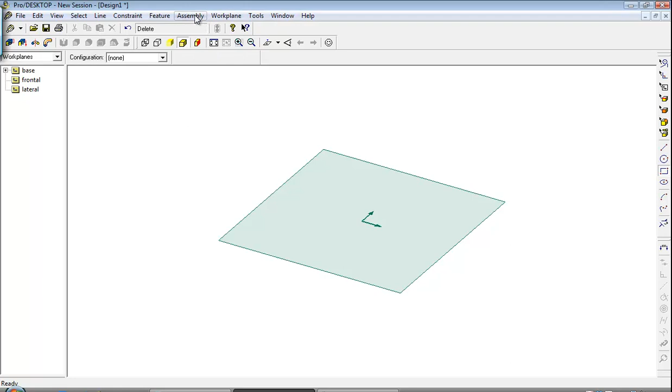The only command I'm going to use is the assembly menu. By clicking onto assembly, I'll click on add component, find the folder I want to drag in, which is going to be the base box, that one. I'm just going to move that out to the centre, because every time I insert a product it'll insert it over top of each other, so this just helps me assemble them.

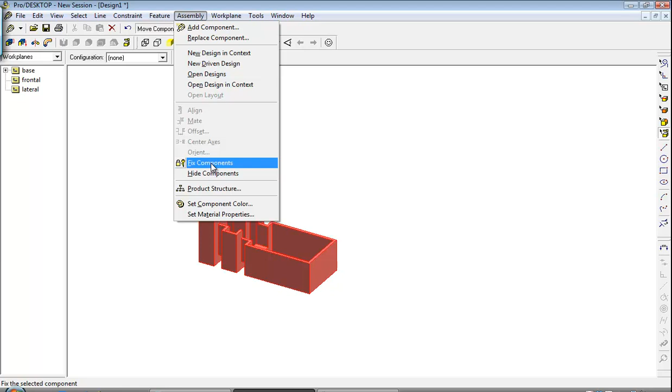Now I am going to fix this and make it an anchor, so I'll go to assembly again, fix components, and that's the only component you need to fix. Everything else will be built around this, or linked or referenced to that part, so it shouldn't move.

So, assembly, add component. Move in the second part, which is going to be internal. I haven't checked that any of these fit at the moment, so I'm hoping they do, but I'll find out in a second. All I'm going to do now is click onto the internal face of the box if I can. I think there it is, and I'll go to assembly and align.

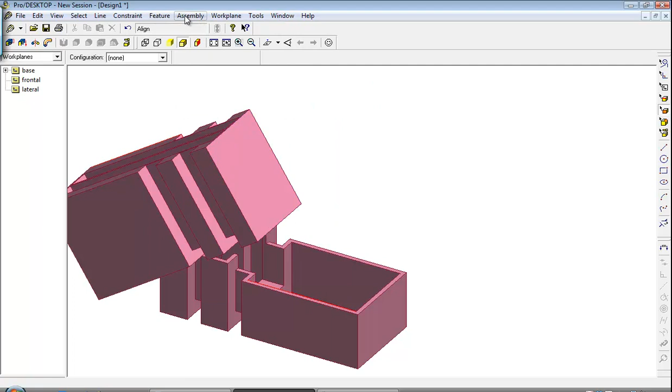If that happens, just undo it and go to assembly and mate. It depends on what you're trying to link. I'll do the same here, assembly and mate. And then what I should find, hopefully if I've designed it right, is that this should slot into the base, which it does.

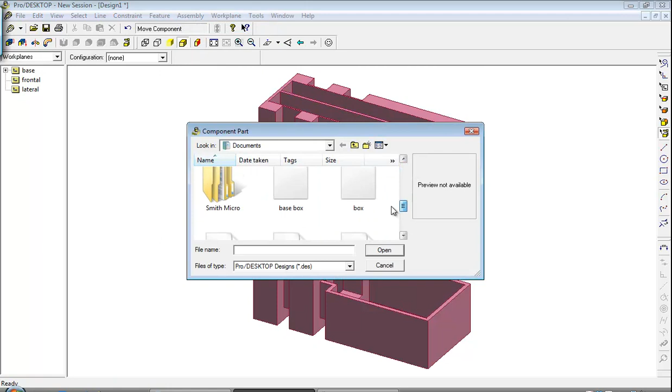Okay, let's zoom back out and go again. So, assembly, add component. This time I'm going to add the DVD box, or the DVD case, and the reason I need to add that is to make sure the actual cases will fit into the box. To half scale it, just press the shift key and the letter H.

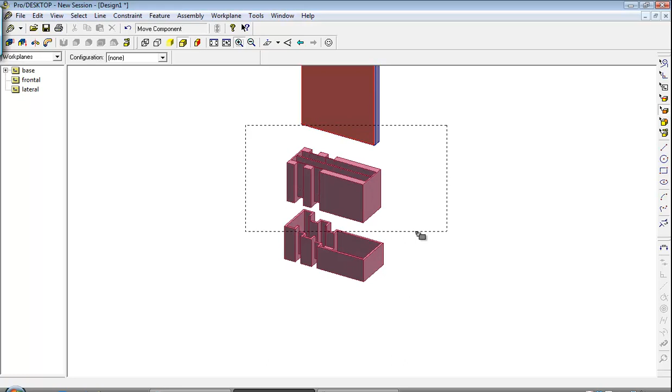Now I might need to zoom in here just to get the internal fitting of the box. I should be able to snap onto it, there it is. Assembly... right, it hasn't clicked onto there, so let's try that again. Assembly... okay, let's try mate. And that one is the internal there, assembly and mate, and surprisingly it fits perfect, so that's good news for us.

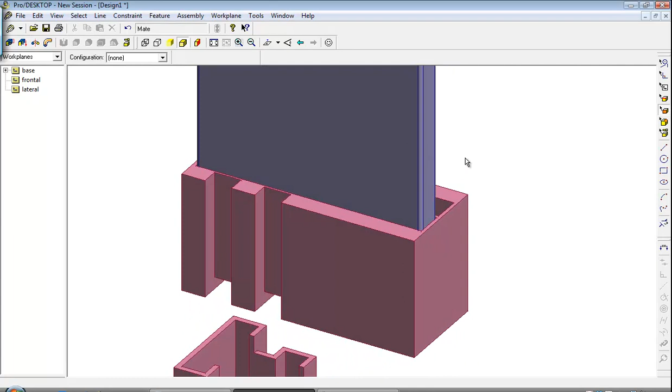Okay, so what I'm going to do now is zoom back out and separate that one, because I need to insert another component, and I'm going to do another DVD case, mainly because I need 2 DVD cases in my box.

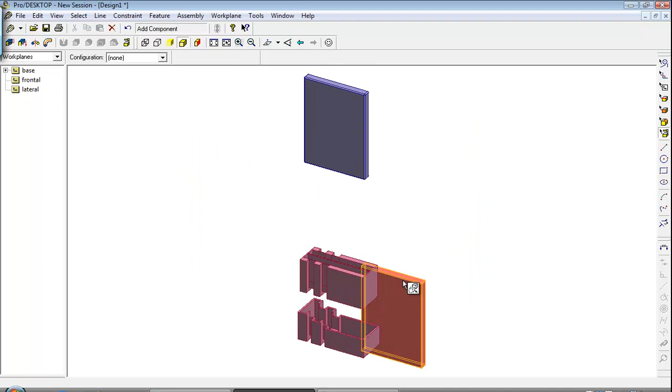So I'll do exactly the same, but this time I want that face to be aligned with, let me just zoom in, it's actually that face there. So if I go to assembly now and mate, and assembly, I'm trying to get the inside, there we go, and mate again.

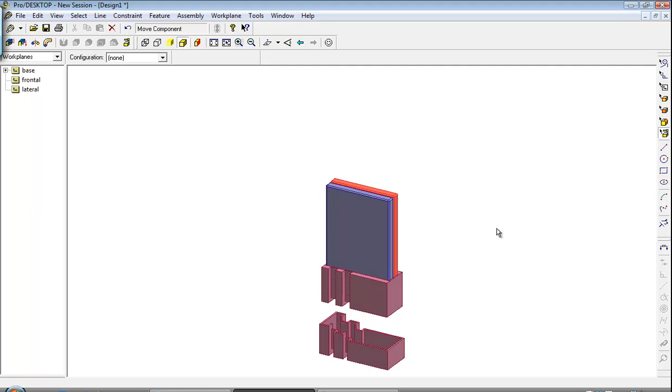And then what I should have is, I'll select the P for part, my 2 DVDs that should slot into the case, so I know that that works. Okay, so I can see the rough profile of the box and how far these need to go down before they need to stop before they hit the bottom.

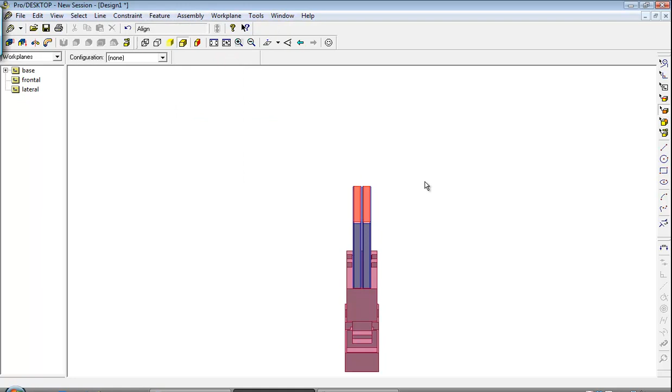Now what I can do is align these 2 so that they go in at the same time. So just by selecting one, whatever I do with one now, the other one will follow, and that will help me when I'm trying to keep things accurate.

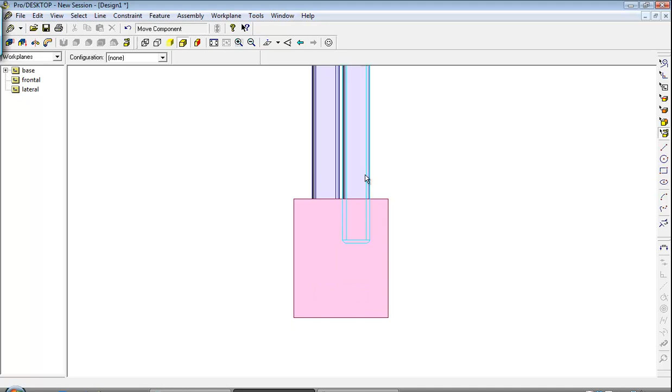Now if I zoom in a little bit, what I'm trying to do is see if those will actually fit into the bottom. The way I do that is if I go to view and change it to wireframe, it allows me to see where the base of the object is, and then just go back to view, back to enhanced, and that's telling me that all that is correct.

And then the final bit I need to do is go to assembly, add components, and if I've done this correctly, I'm looking for the top, click onto OK, and if I align that with the bottom, I'm just going to press F for face and do that, assembly and mate.

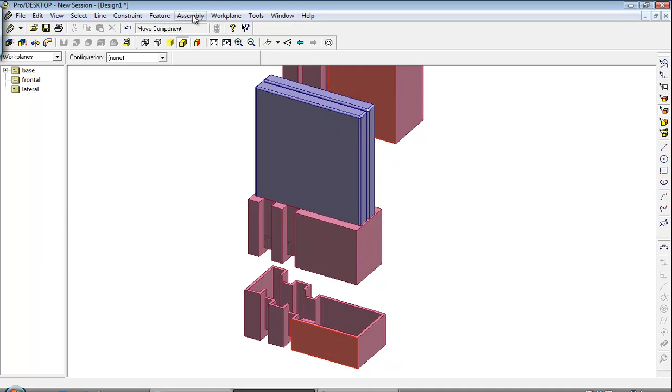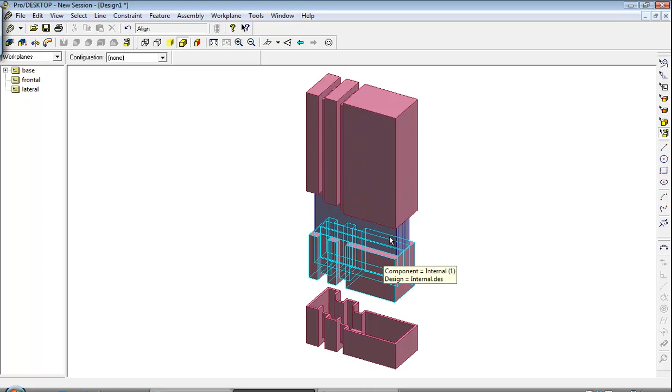Now it hasn't worked that time, so if I go to align this time, there you go, and click onto that side and that side, go to assembly and align, and what I should actually have then is a box that goes together. So if I move the whole of that, hopefully it should allow me to move it, but perhaps it'll only let me do it one at a time.

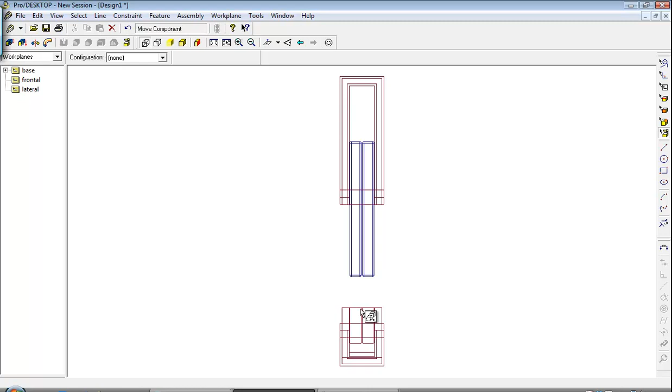So what I'll have to do is construct the box the same way as I've just done it. So I'll click onto wireframe, and then I can see that that has to fit. I may have to zoom in to get this right on here. Thereabouts, and then I need that piece to fit inside.

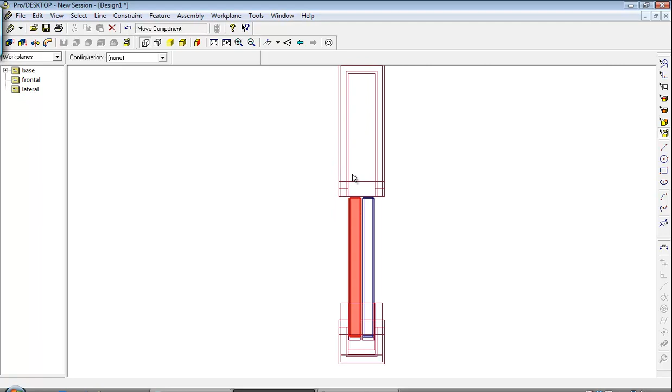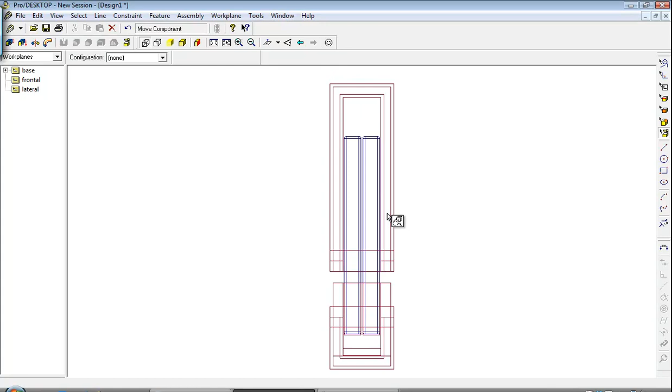Like so, a couple of millimeters to spare, and then hopefully I can bring this one down until it makes contact with the top of the box, and you can see that the DVDs fit inside the box. So that's pretty good, so you can see that everything fits together.

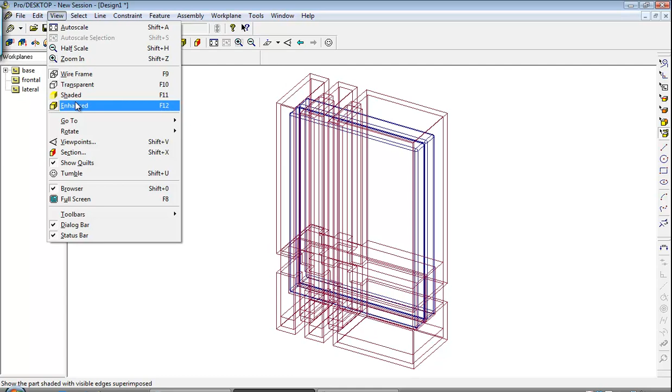So I know I've designed my box quite well. Let me just go back to where we've got line and view and back to enhanced. Now the idea of that box is that you will see this piece that's in the middle. So if I go back to the wireframe...

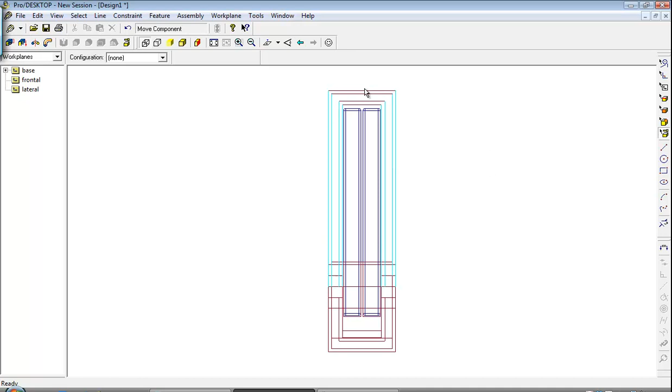It's actually designed on purpose so this box can actually collapse down onto the top, which I think is there, and it'll still fit. We've still got the space on the top.

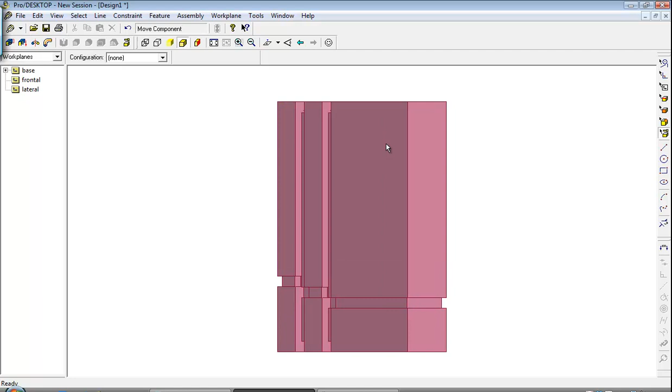If I just go back to the enhanced version, we should be able to see that although we've got the cases in there, we'll still see this part here, and in fact looking at it we can see we've still got some of the DVDs sticking through the top, so in fact it should look like that if we've done it right.

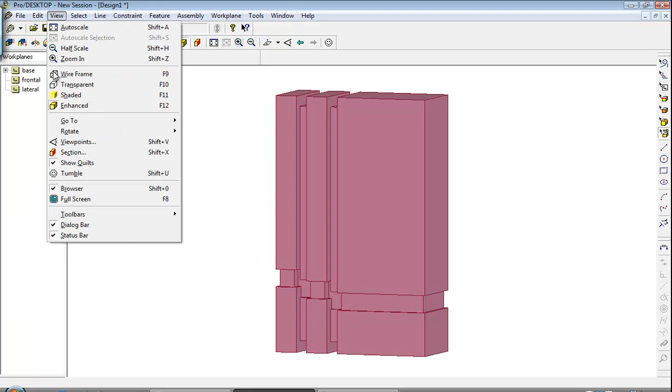So what I'm going to do now is just click back onto the view, the wireframe, and just check from the sides that that fits. Which it does. And that is our assembly drawing.

So the first part that I'm going to do is take this into album, and then the next video clip will just show us how to import it in and how to apply textures and rendering.